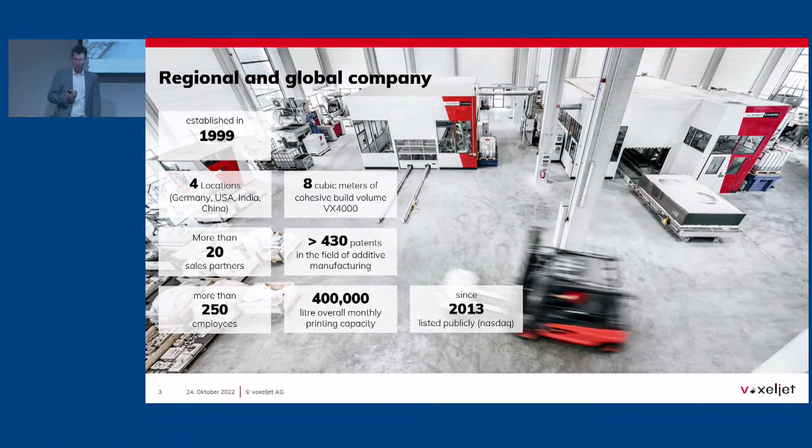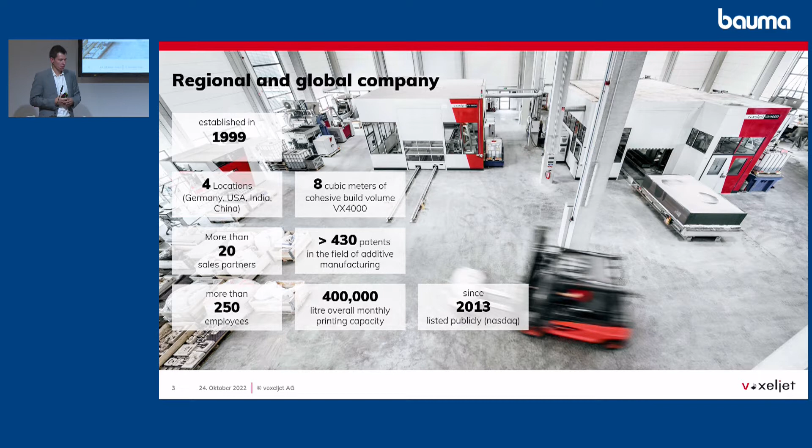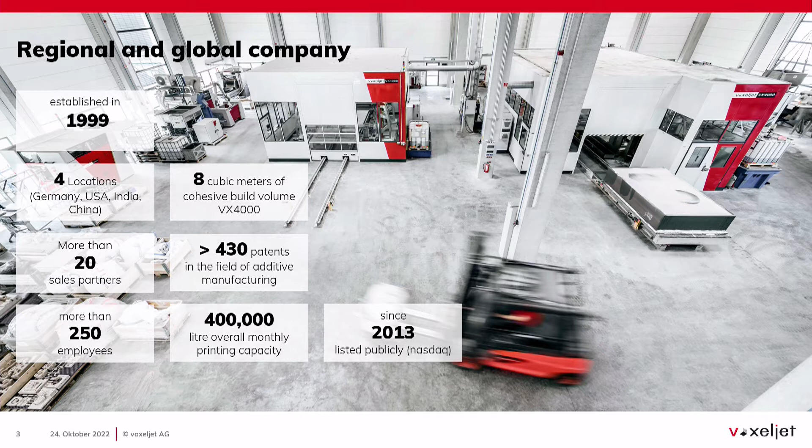Voxeljet is a company founded in 1999, here in Munich. Back then we focused on binder jetting, and since then we've grown, going public in 2013 on the Nasdaq. Since then we've grown our network to 4 global locations, more sales partners, and quite large printing volumes, up to 400,000 liters per month.

So our process in 3D printing is binder jetting. How does that work? You have your CAD file, you put that on the machine, and the machine slices your CAD into tiny layers.

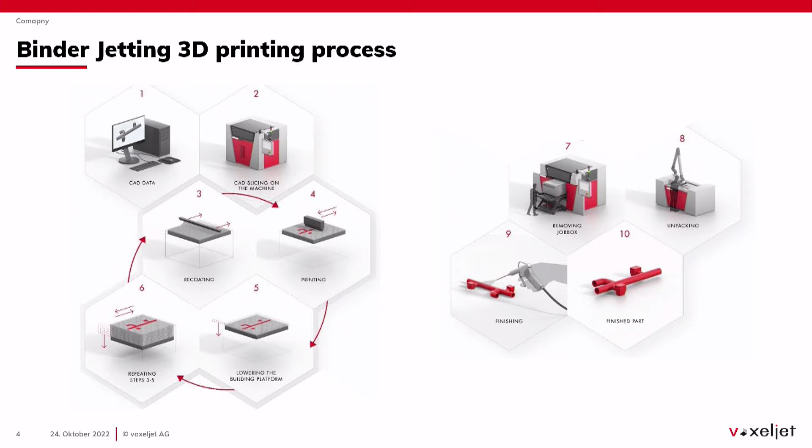The printer starts by laying down one layer of particle material, followed by the print head, which applies a binder. In essence, it's a glue applied just on those spots where you want the material to be bonded or glued together. Then you lower the build platform and start that process over again until you've reached the desired height of the part.

Then you unload what we call the job box, full of bonded and unbonded material, and remove the unbonded material by sucking it out with vacuum cleaners. Then you use compressed air to remove powder adhesions, etc., and you have your final part to continue to the next production step.

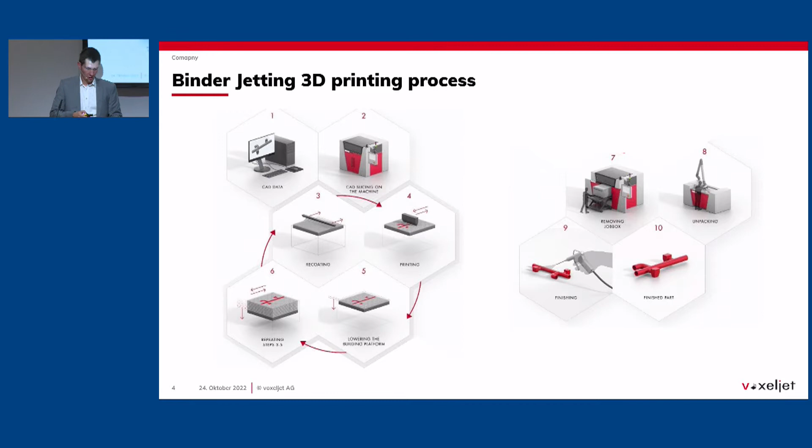Our business model is based on two columns. On one side, we have the service business, which is essentially a copy shop - you send us your CAD files, we print them for you flexibly, so you have them in days or weeks, not months. On the other hand, we have the system side of the business, where we develop these printers and sell them worldwide.

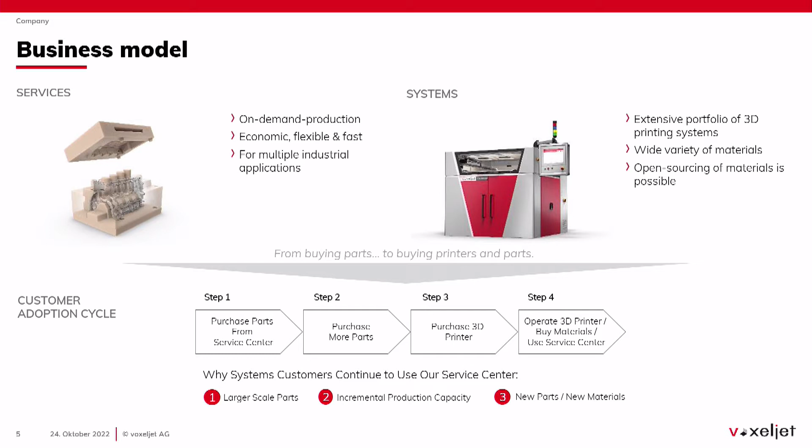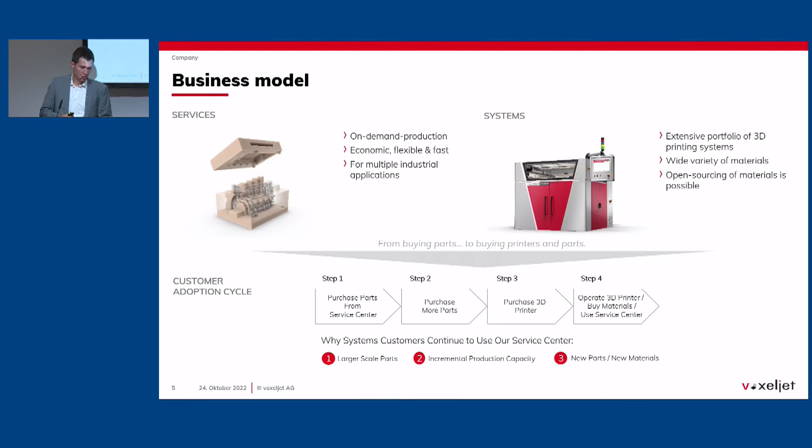Both these columns go hand in hand, meaning if you're new to the technology and don't have experience, you want to try it out, you have a low barrier - just use the on-demand production to do some trials. Then if it works out, you increase volumes over time until it becomes more economical for you to run your own printer.

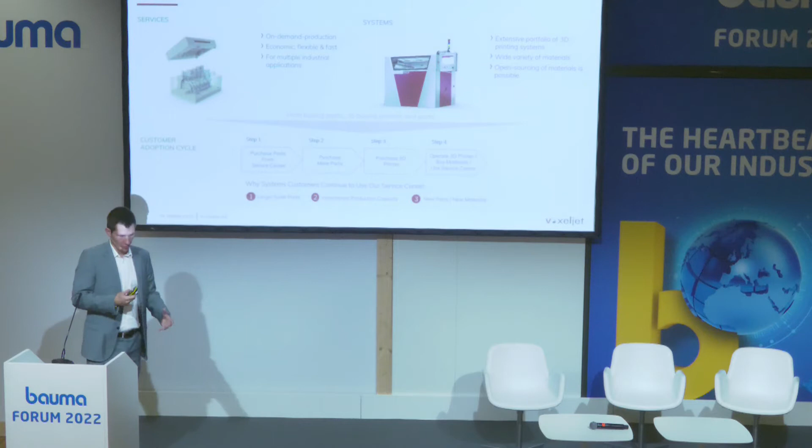And then you might even have overcapacities where you can use our service center again. Now, I've talked a lot about 3D printing processes, but some of you might just know 3D printing from going to the electronics store and seeing a small box called a 3D printer. Yes, it's also a 3D printer, but in our case it's rather something big.

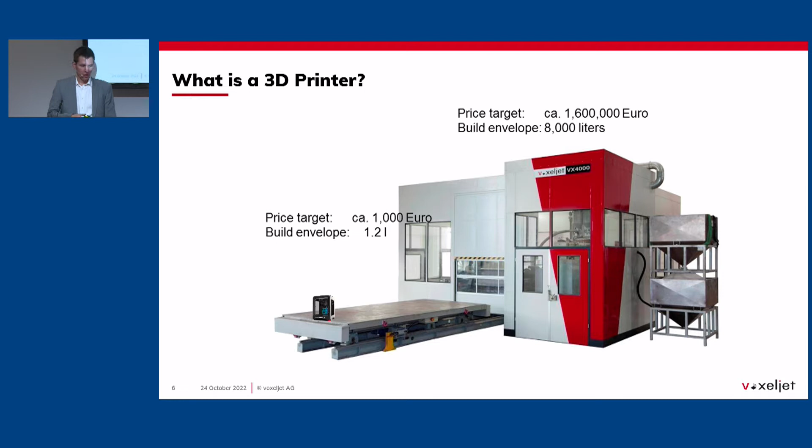A build platform 4 meters by 2 meters by up to 1 meter in height. And of course, that's industrial equipment, which also reflects in the price.

Our applications - where is this technology actually being used? We come from metal casting, so we print sand molds or PMMA patterns for sand casting, or investment casting for automotive, aerospace, and heavy industry.

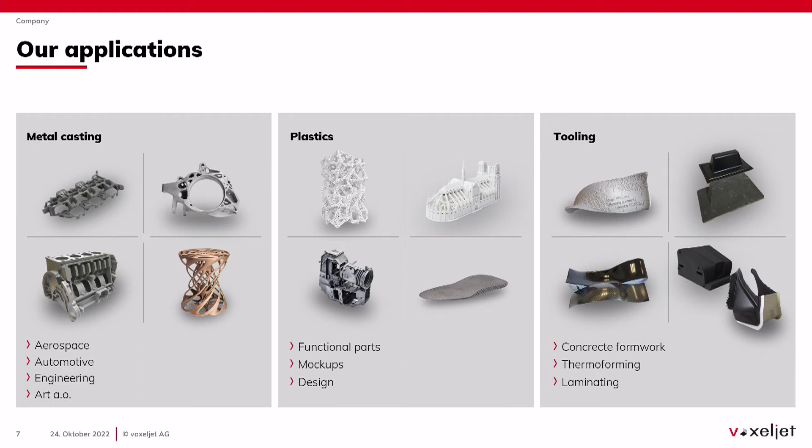We also print plastics for architectural models and designs. Here, for example, you see a designer lamp, but also functional, rigid parts.

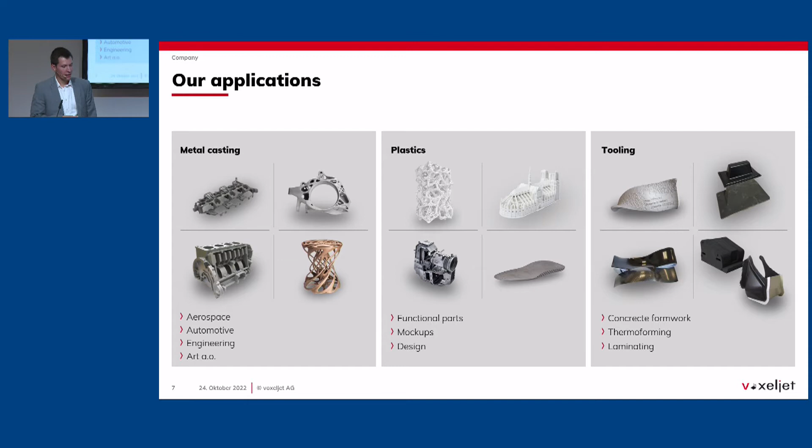Or we use it for tooling, which we also categorize into concrete, basically using the sand molds we know from concrete or sand metal casting, using that to pour concrete. So it's actually formwork that we're printing, or other tooling such as carbon fiber lamination or vacuum forming.

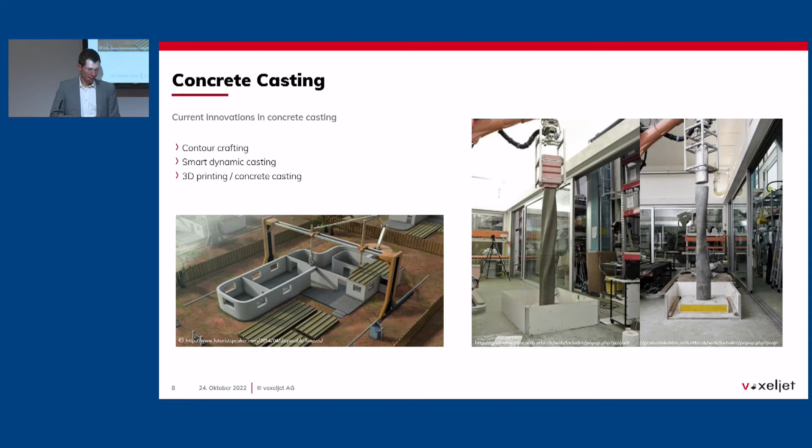3D printing in construction or concrete printing has already been out there for a few years. Most of you might know the kind of 3D printers that can print entire houses based on extrusion. Then there's another variation where you have a robotic arm and a matrix attached to it to realize nice complex columns. Where we come in is actually a third kind of technology - binder jetting.

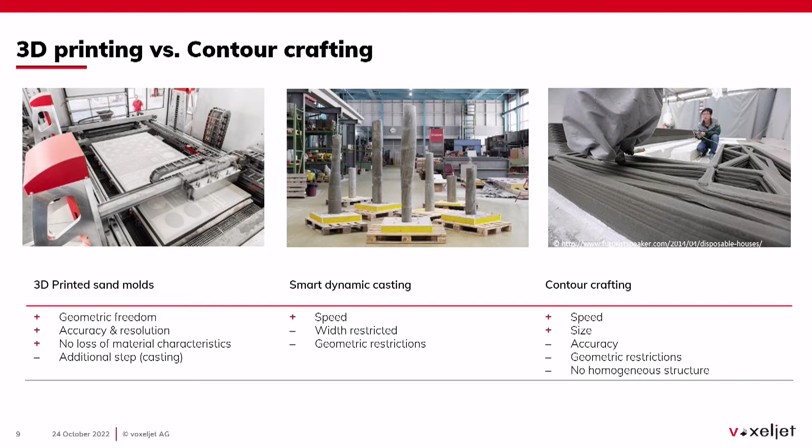So we don't print concrete directly as the others do, but each technology comes with its benefits and disadvantages. Binder jetting is good for accuracy, geometric freedom, and fine detail resolution, while the others might realize bigger build volumes or be faster by volume.

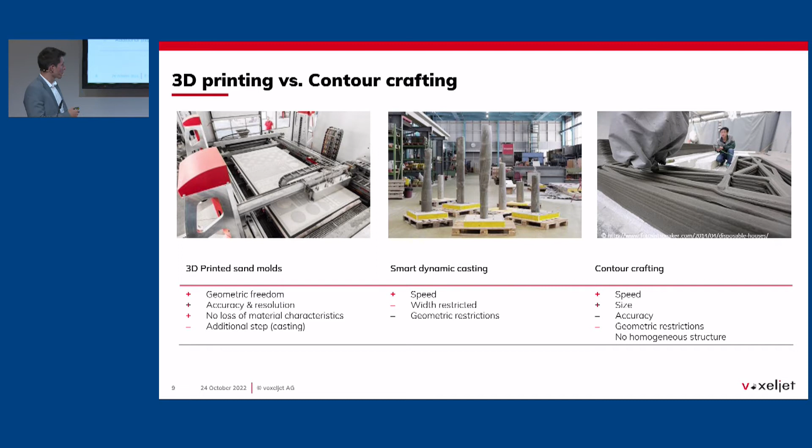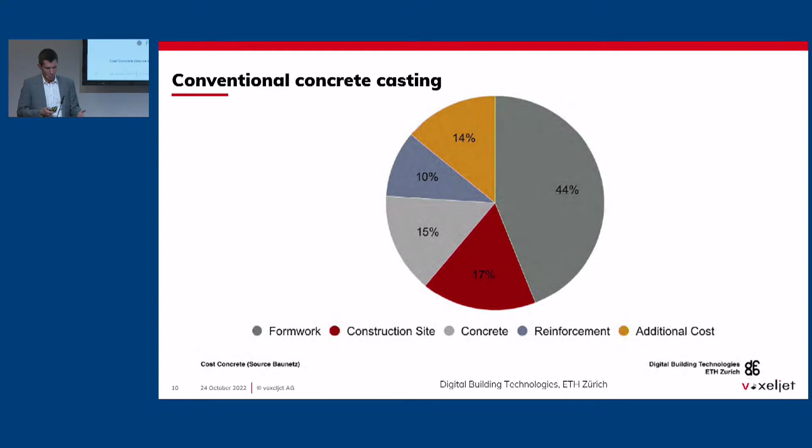So if you look at this, 3D printing is not price efficient or price effective if you just want to realize plane areas, rectangular shapes, or even singularly curved parts.

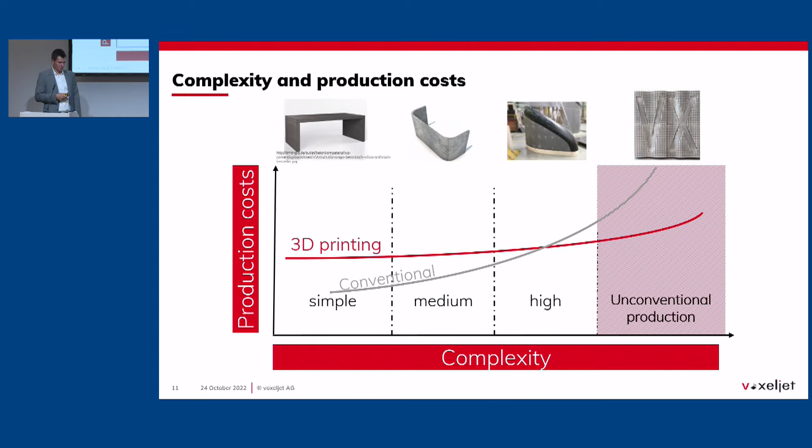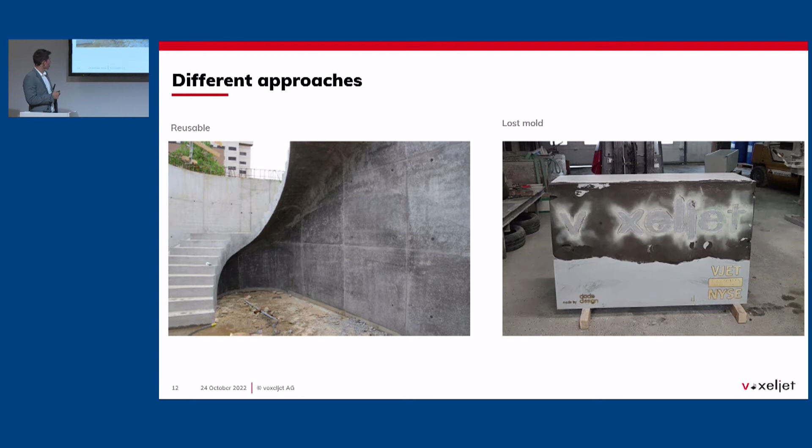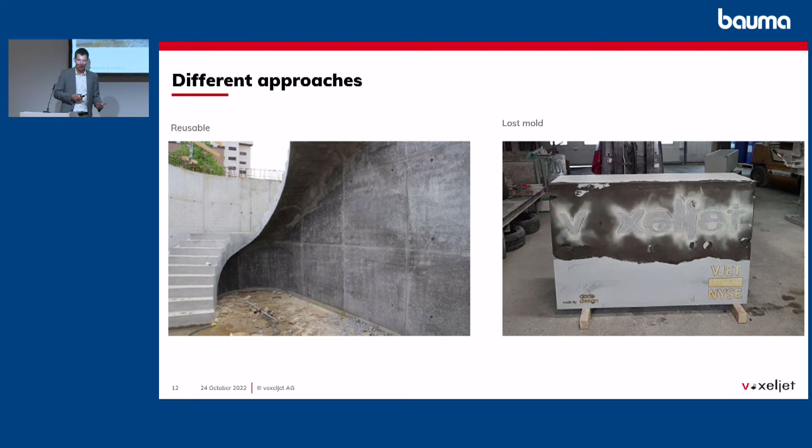Where it really brings an additional benefit is when you have high complexity, meaning multi-dimensionally curved geometries or even surface structures on top of that you might not be able to realize with conventional methods anyway. Then you have two ways of application: you can realize complex formworks that are reusable, or you can produce one-offs, where you have a very complex shape but have to destroy the mold to demold your concrete part.

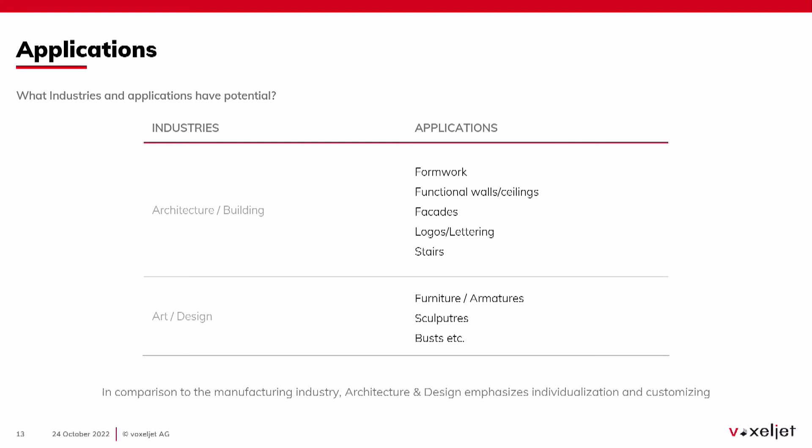Where have we used these applications so far? Of course, formwork, but formwork is quite a broad area. We have functional walls or ceilings where we integrated electric connections and fire installations into the printed part already, so you didn't have an additional step after casting the concrete where you'd have to hammer a line out, put the electrics in, and then redo that step.

Complex facades, of course, or customization and individualization with logos, lettering, or in the art and design section where you have sculptures, furniture—highly individualized items.

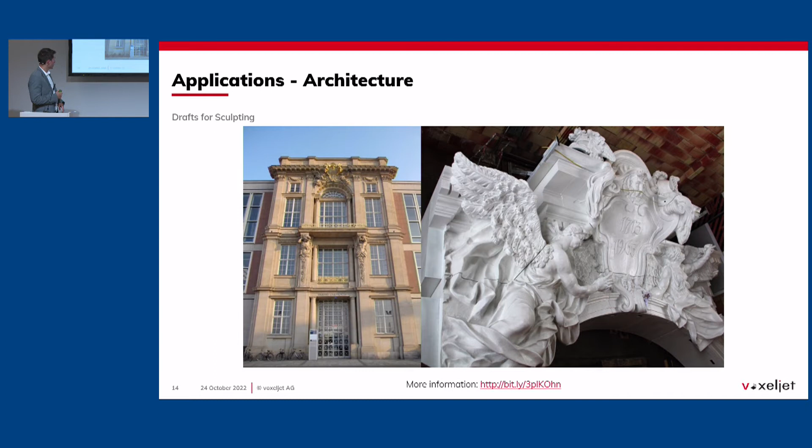Looking at this example, we had to renovate the facade here, the upper part and the two columns. First we have to work with CAD files. How do you generate a CAD file? You use 3D scanning to get to these CAD files, and then we printed the geometry, after having them repaired virtually, in several pieces—you can see the parting lines here. In that case, it wasn't used to cast concrete, but as a draft for sculptors to sculpt it out in stone.

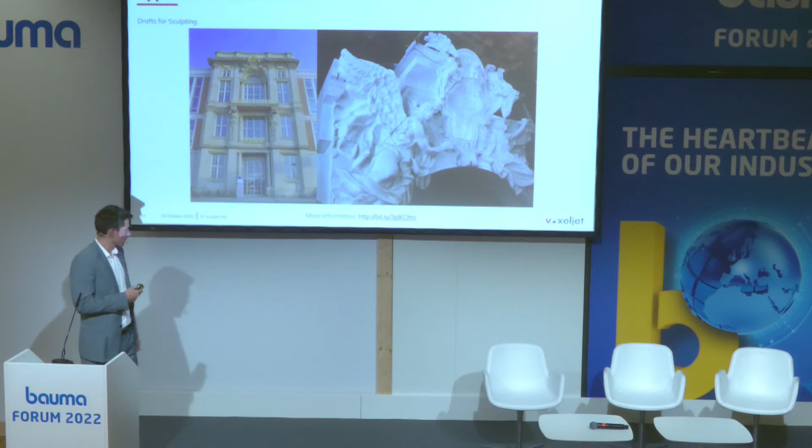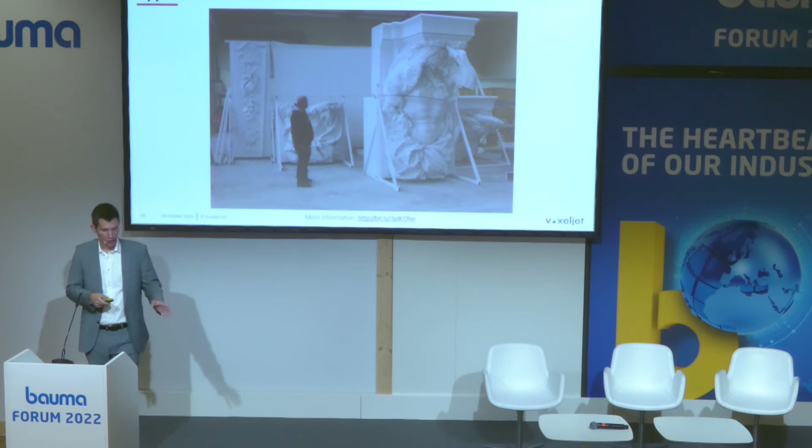Just to give you an idea of the sheer size of that project, this is just one part of the column being printed in two individual pieces. These were sent around the world to various sculptors to work simultaneously, saving time and bringing that facade back to life.

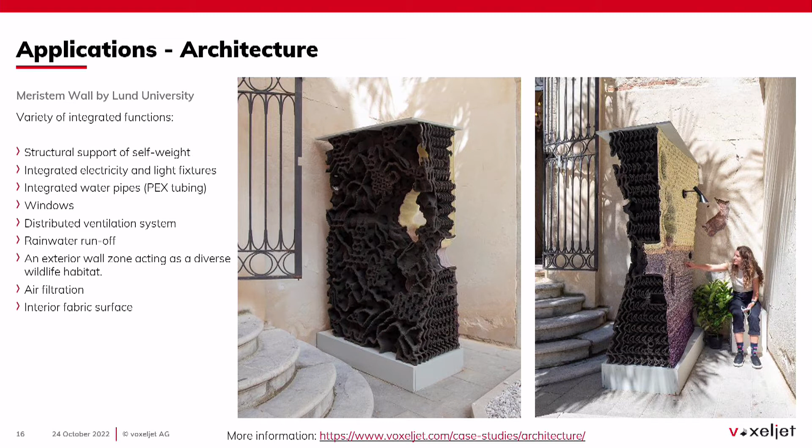Another concept study comes from the university in Lund. This is actually a wall printed out of sand, and as mentioned before, it already includes various installations such as air filtration, a ventilation system, rainwater runoffs, but also habitats for nature and so on. Of course that's very futuristic as it's a concept, but this is where the technology could head.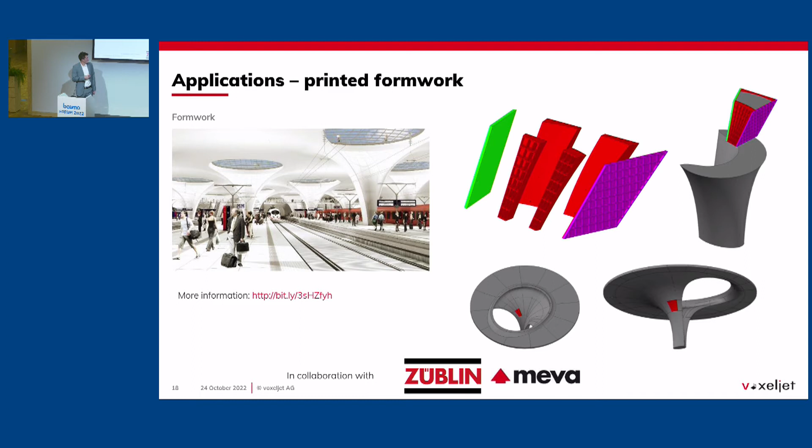After the lab tests, we also went bigger. Some of you might know this project—it's Stuttgart 21, a famous train station currently being built in Stuttgart. Out of this column we took a small piece and did a prototype. Up here you see the red parts—these were 3D printed, joined with conventional formwork, and then cast in concrete. So the printed molds or formwork are handled the same way as conventional patterns.

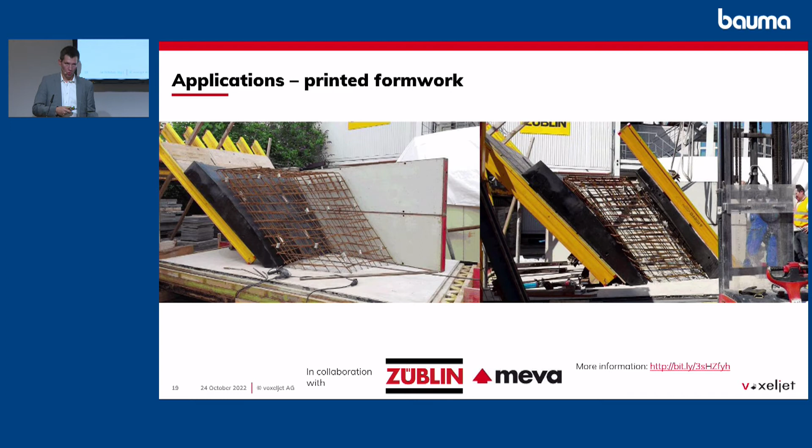In that case we were quite lucky, so it worked. As you see, the printed formwork itself is still quite thick and therefore heavy, but it was water repellent—it doesn't soak or become bigger over time from absorbing water.

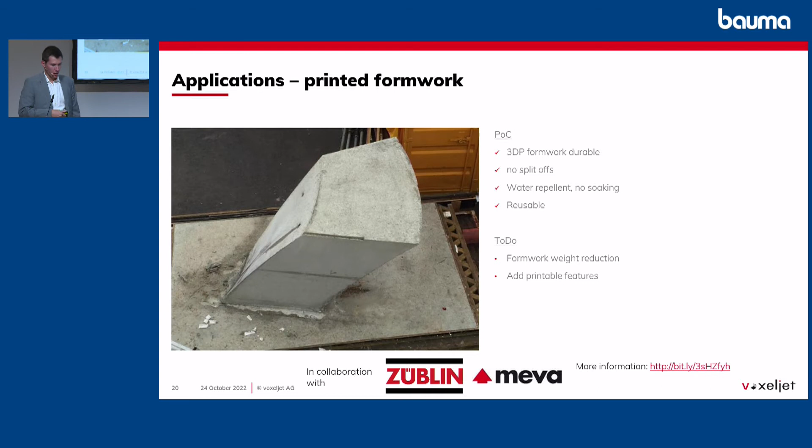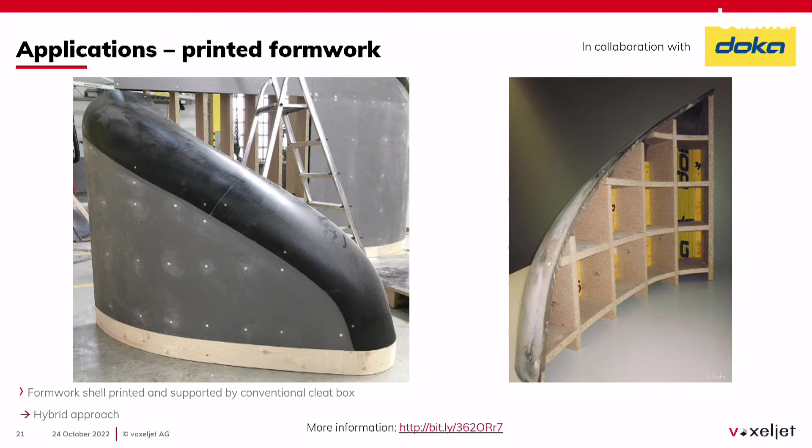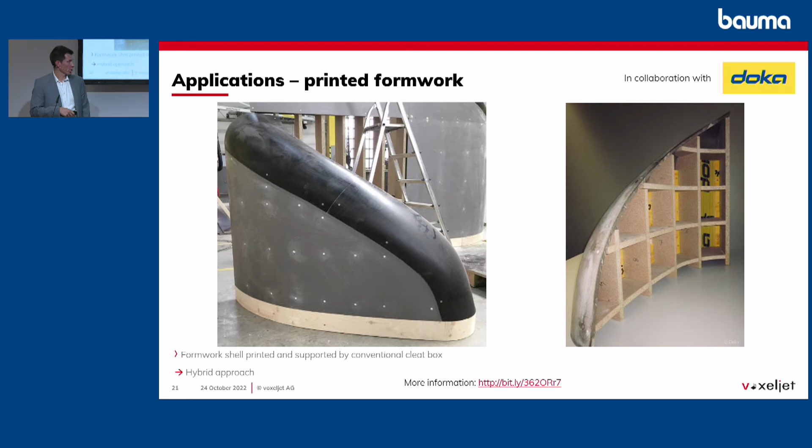But of course there was room for improvement. In the next step we did another project together with formwork company Doka—a staircase with a multi-curved formwork, which you can see here. In that case we really tried to max it out: we printed the formwork elements just 21 millimeters thick to perfectly join with conventional wooden formwork, then attached it to a standard cleat box to come together as the final formwork.

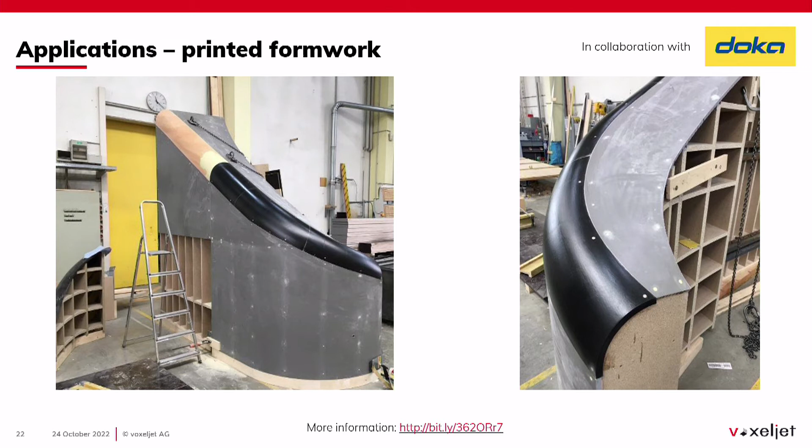Everything that's black here was actually 3D printed. Even up here, the conventional part had to be readjusted to perfectly fit the 3D printed part, but overall it was a perfect fit. On the construction, we had deviations of less than a millimeter when joining it with the total formwork, and the casting came out great.

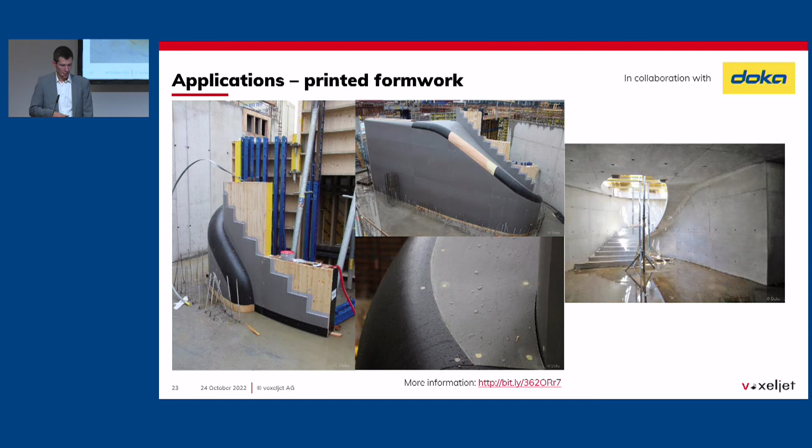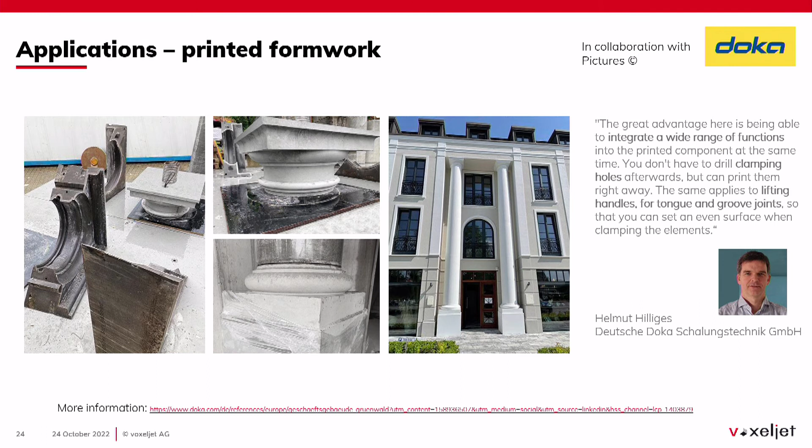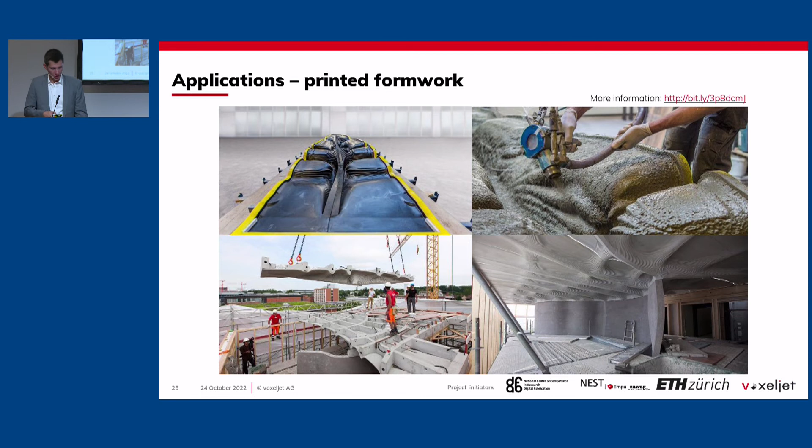working as a functional ceiling that already had technical installation like light and fire sprinklers included. So the approach in essence is you can also realize greater areas using 3D printed formwork. However, if it's just a standard, not that complex geometry, it is not that economical.

So let's assume you have a huge facade, several hundreds of square meters, and you want to realize that with a complex geometry. You would usually take out, let's say, 5 individual pieces, like a puzzle that can be puzzled together again, and that are repetitive.

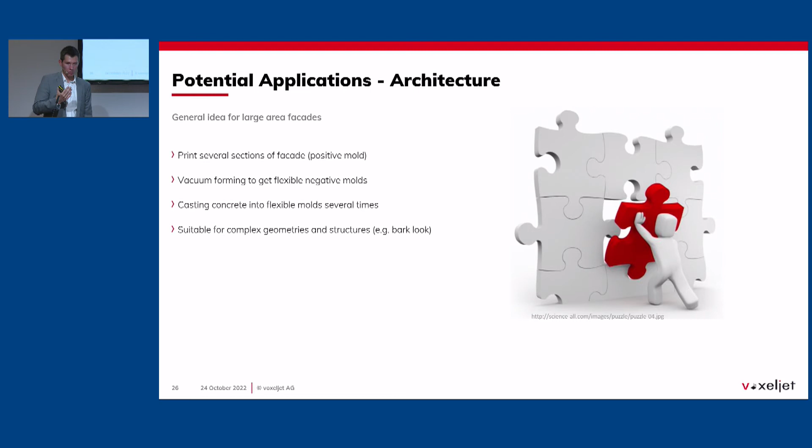We would then print these formworks and take off a silicone mold, which has the benefit that you can reuse the silicon mold more often than a printed sand mold. And once your silicon mold has reached the end of life, you still have your master mold 3D printed to take off another silicon mold.

And that way, there's a project currently being realized where you can actually realize a lot of square meters making use of this technology. For example, with surface geometries like a bark look.

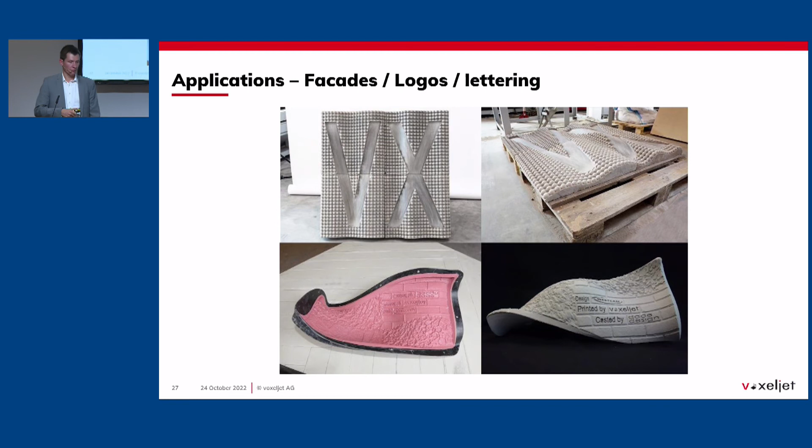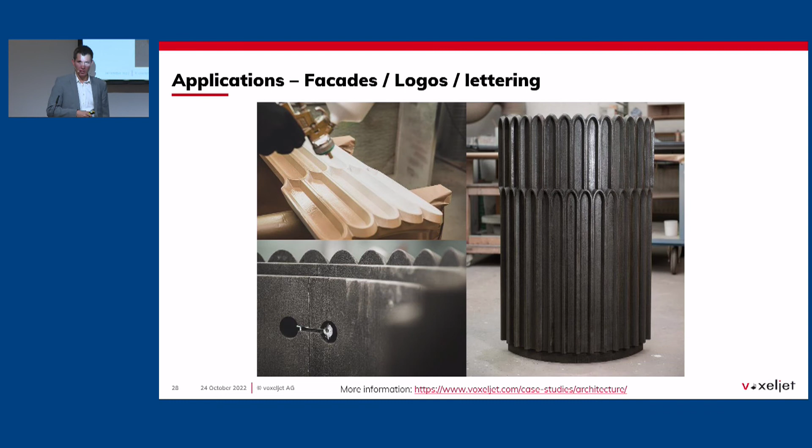Or restoration: again, you scan the facade, you print the mold and pour concrete into it to get it back to life.

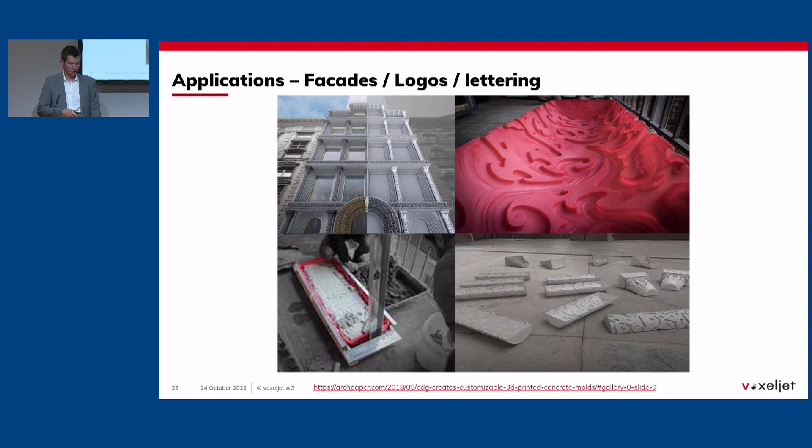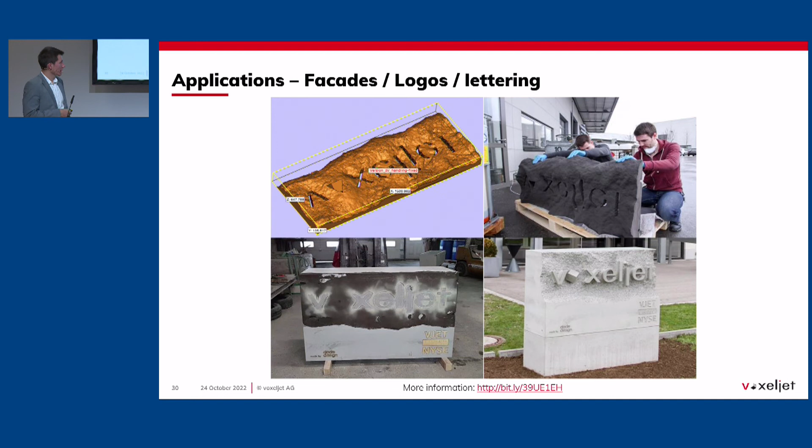And then last but not least, what we call our company stone, where you have the company logo, but it's something like a rock formation it's integrated into, with undercuts, etc. So the mold you can see on top cannot be demolded without being destroyed.

And this one was then integrated into a standard wooden formwork. We just used wooden boards to cast the outer sides of that stone. Then on the next slide, you actually see the undercuts that were realized, so you have smaller diameters or smaller wall thicknesses here.

Then at the front, you have functional integrations like holes that rainwater can just flow through, and ice, for example, doesn't get stuck and break the concrete part.

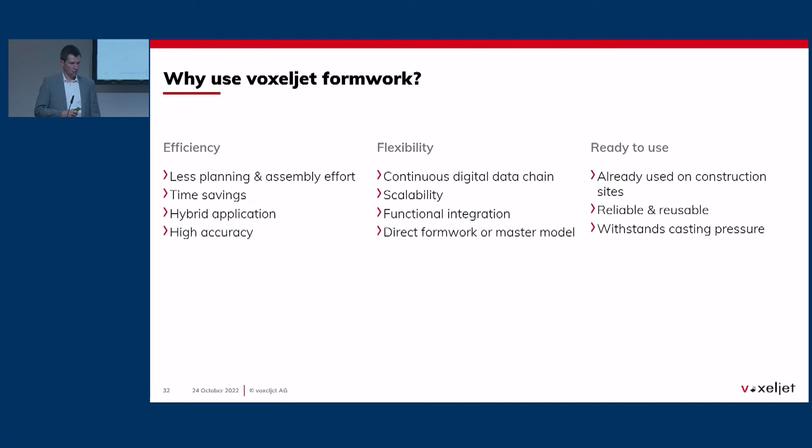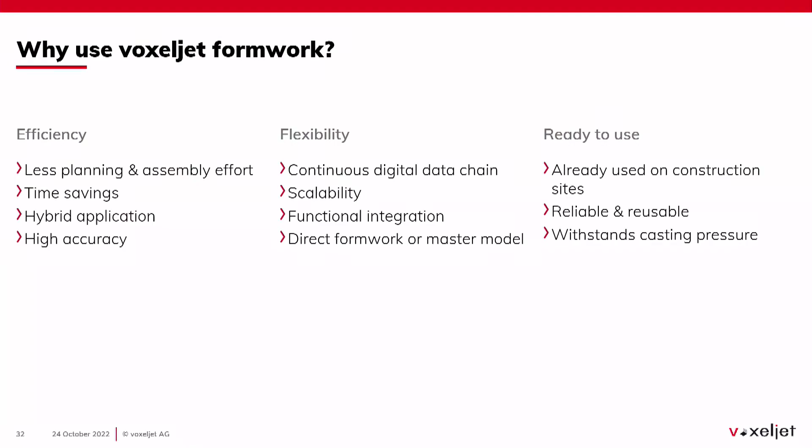So why should you use 3D printed formwork for your project? First of all, I want you to take 3 key aspects away. One is efficiency: you have a fully digital planning and assembly line.

So you plan digitally, you produce the mold or formwork digitally, and then you integrate it on the construction site, which saves you time on the planning side. Especially if you follow that hybrid approach, you also have an economical effort, so don't print the full formwork and the full area using 3D printing, but just take out the bits and pieces that are really complex, multidimensionally curved, etc.

Then flexibility, as just said, still a digital data chain. So if you actually have to change something on short notice, that can be easily realized by just pushing the button, and the printer will print the part again in the changed design.

It's scalable, which means we run printers from sizes like a shoebox up to 8 cubic meters, 4 by 2 by 1 meter. And even if that is not enough, you can still slice your design into several pieces and puzzle it back together.

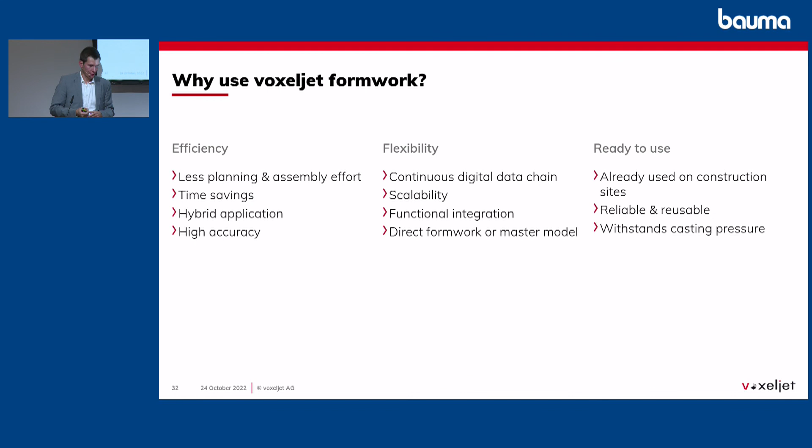Functional integration, as I mentioned, fire sprinklers, etc. And you can either use the printed part directly to pour concrete, or use it as a master mold to take the additional step of taking a silicone mold of it, and then use the silicone mold to cast the concrete.

Ready to use, which means, unlike other 3D printing technologies I introduced today, this is already a technology being used on construction sites today. It's been proved reliable and reusable, and it's also approved to withstand all kinds of casting pressures that might be needed for formwork constructions.